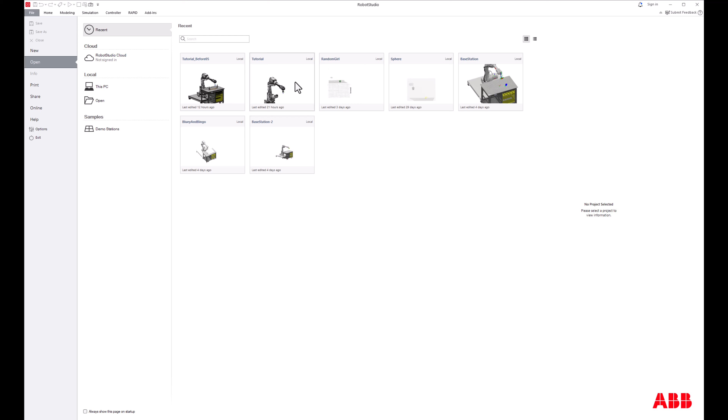So we are going to open up our old tutorial that we've been working on. And in this tutorial, before, we created a robot base, put in a robot cart, actually even had a path inside of it. So we're going to use this, but once again, I use a lot of shortcuts, and the keyboard shortcuts help me be quick at doing things. I'll try to call them out as I'm doing it so that you can kind of know what I'm doing in the background.

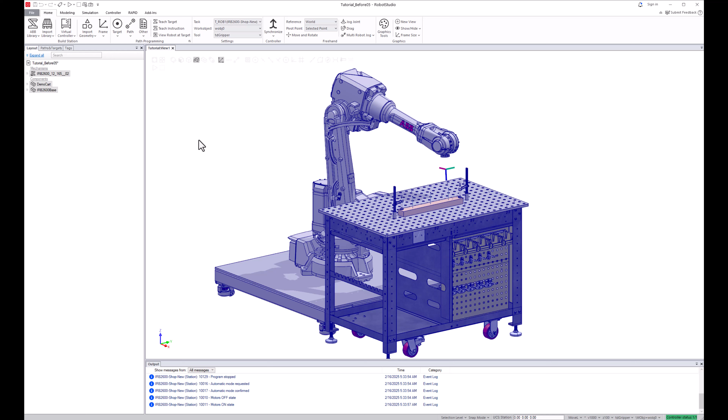For example, I want to make all these invisible, so that shortcut is Shift-Control-A. And again, if you want to see that shortcut, you can go to Visible, and it shows it right here, Shift-Control-A. That's what the shortcut is for visible.

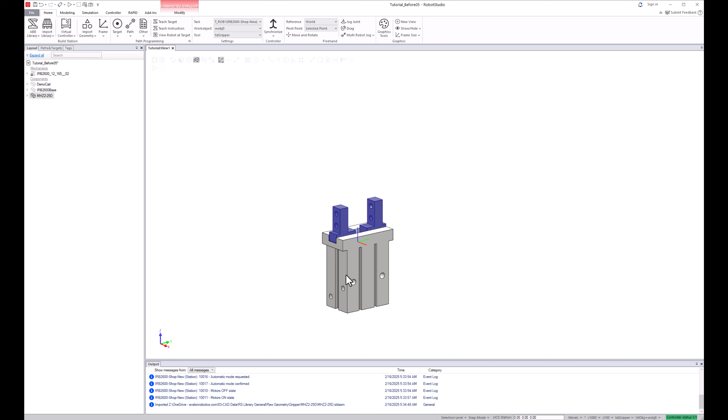So now that I've done that, we're going to start today by creating this gripper. This gripper is an SMC gripper. You can download it right off of the SMC website. It's an MHZ2 25D. These are SolidWorks models that I just downloaded straight from SMC's website. So that's the gripper that we're going to be working with today.

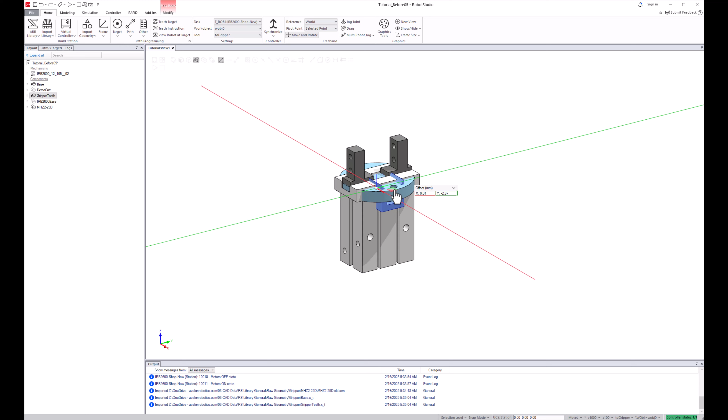I created a couple of parts inside Onshape to be able to mount this gripper to the robot. So I'm going to import those two parts into it. That's a base, and then one of the teeth. So I call it a tooth, but I'm going to call these fingers and this a tooth.

One of the things we have to do to get started is I'm going to hide the actual physical cylinder, the gripper, because I want to focus in on this base plate. The base plate is going to be attached to the IRB 2600 using these holes out here.

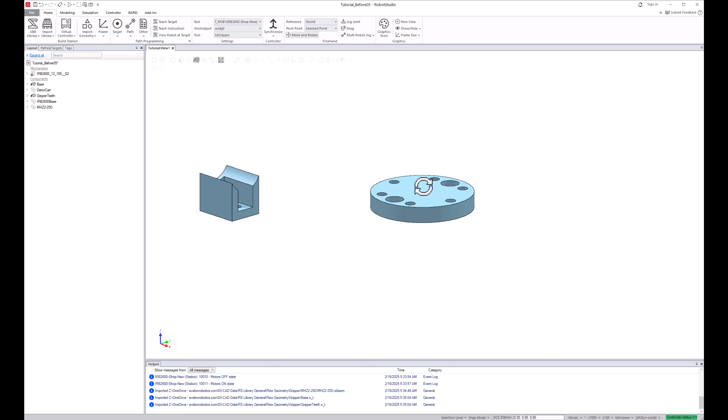When I designed this in Onshape, it's actually flipped around on the orientation that I want to have. So I'm going to come into this, and I am going to reposition it. So I'm going to do set position, and I'm just going to flip it 180 degrees. Oh, sorry about that, I moved it 180 degrees. I'm going to flip it 180 degrees around the x-axis, and then I know that it is 9.53 millimeters tall.

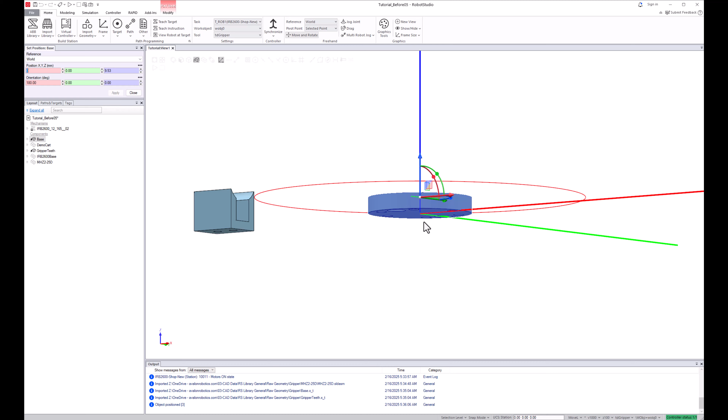So now what you can see is that the world coordinate system is down here in the center, and that's where it's going to get snapped to the robot. So everything is based off of this coordinate system, and that's the way that I want it to be in this. So I'm going to go ahead and close that.

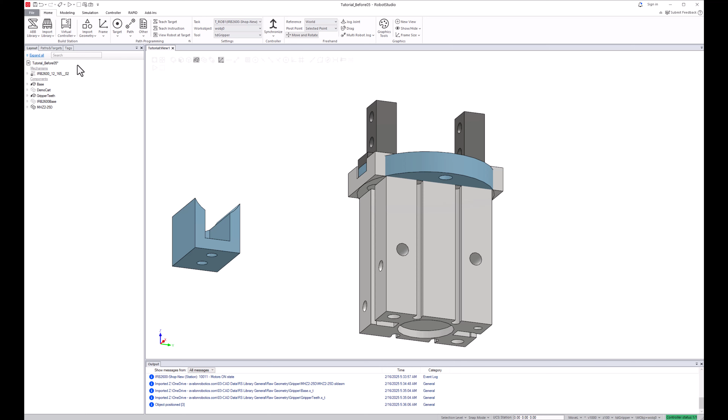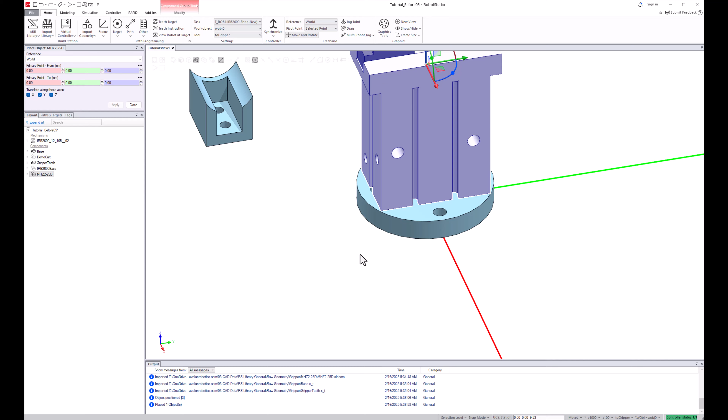I'm going to show Shift-Control-A, the cylinder, and now I want to move the cylinder up to the base there. So we're just going to go with a 1-point place command. This moves the cylinder. I'm going to make sure you select the cylinder and then select inside the XYZ combo boxes up here. And then I'm just going to select the cylinder, center of it down there to the center of this, and apply. And now it's moved it up to that, which is great.

That works good. And now if you can see, the mounting holes aren't lined up. So I have these bosses in here to put a bolt up through to mount to the cylinder, and then using these holes to mount to the flange of the 2600. So I'm just going to show you that here.

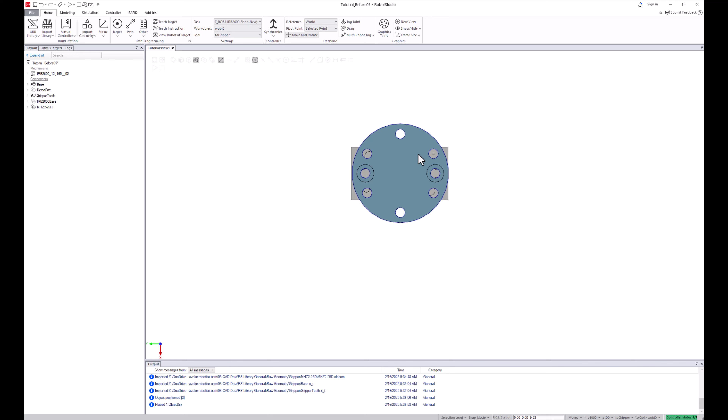I'm going to look at the bottom of this. Bottom view I have is Shift-Control-B. Okay, so then if I select the base, I'm going to show that I can grab the gizmo here, and I can rotate it around. And here you're going to see that there's the two holes that I want to align it to. And that's very interesting. So it's actually offset.

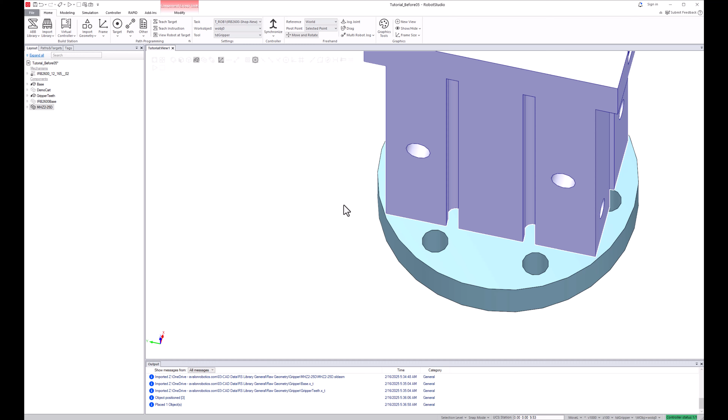So what that means is that, and I noticed that when I was moving the cylinder, I actually saw that there was a little bit of a shift when I did it. So what I'm going to do is I'm just going to look at the position of that in relation to the world coordinate system. And here you can see that there's a little bit of a shift. So I'm going to make these 0 and move that back.

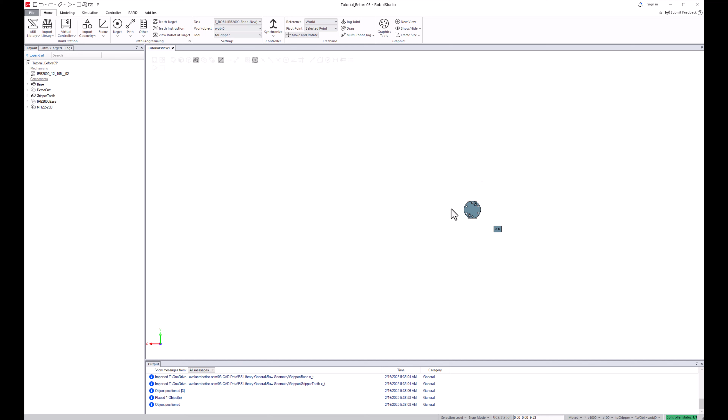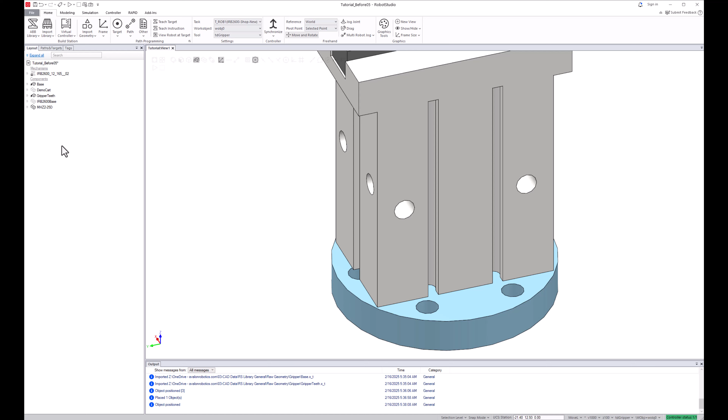So then when I look at it from the bottom view, select the base here so it's at the origin. And then when I actually rotate it around, we're going to see that those line up perfectly. Okay. So now I'll be able to put the bolts in through here, bolt it to the cylinder, and then you can see I'll have 4 bolts around it to be able to bolt to the flange of the 2600. So that's perfect. So now that we got that, I'm going to leave the teeth off of it for right now.

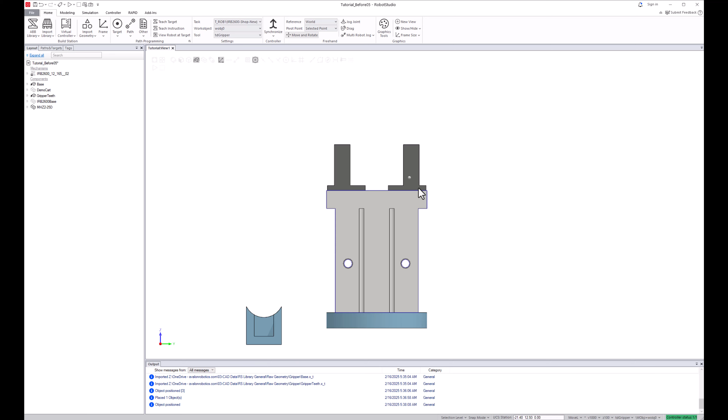And what we're going to do is move on to the next part, which is creating the mechanism. So this gripper has these 2 parallel fingers that move together mechanically with a piston inside here. So right now, nothing's going to happen. There's no motion, nothing. And how we do that is we're going to create a mechanism.

So I'm going to come up here, modeling tab, create mechanism. My mechanism, I'm going to name it gripper. It's going to be a mechanism type of a device. And then you got to create links and joints, and I'll show you how to do that. So double click on the link, brings up the create link box. And this is, I'm just leaving the names. Link 1 is fine. Oh, I forgot to do one thing. I'll show you here. I'm going to cancel out of that.

So in order to create mechanisms, you have to have the components in the main tree. They can't be nested underneath the component group. So I'm going to delete this because I'm going to use these 3 as my parts for the mechanism. So I'm going to come back over, double click links, come into here. I'm going to select the body. I'm going to set it as a base link, move it over into added components, hit apply. Okay. So it showed up as link 1 over here.

Now it just popped up another box here because I want to add some links to it. Another link is one of the fingers, add it to added components, hit apply, shows up on the right hand side. And then the last one, the other finger, add it to added components, hit apply, hit cancel. Now we have 3 links over here.

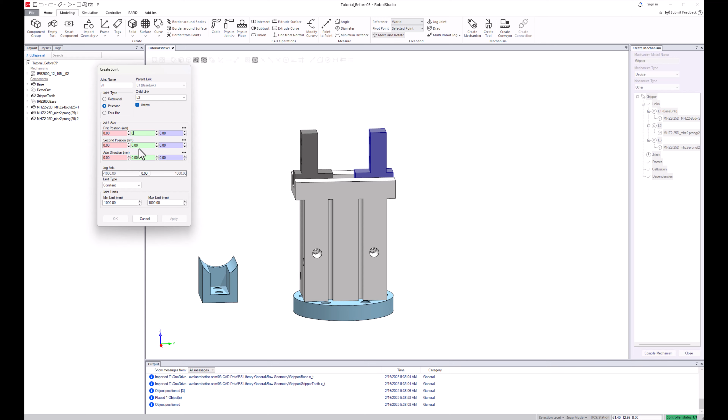Joints, okay, double click the joint. We're going to create a prismatic joint. It's just a linear move is all that prismatic is. I'm going to actually select my axes for this. So my axes is going to be, I'm going to come in and select my filter here so that I can select these points. So I'm going to do that as the first point. That edge is the second one. So my axis runs right through the center of that.

My limits are going to be 0, and then I just know that it's negative 7.1 millimeters. And what you're going to see is now that link moves back and forth. So I'm going to apply that, and now I can do the next one.

The most important thing when you're doing this is you got to make sure of how your links are related to the base link. Right now it shows that my link 3 would be in relation to link 2, which if link 2 moved over here, then link 3 would move according to that position. And that's not what we want. We want link 3 in relationship to the base link. Prismatic, we're going to come in, create my axes.

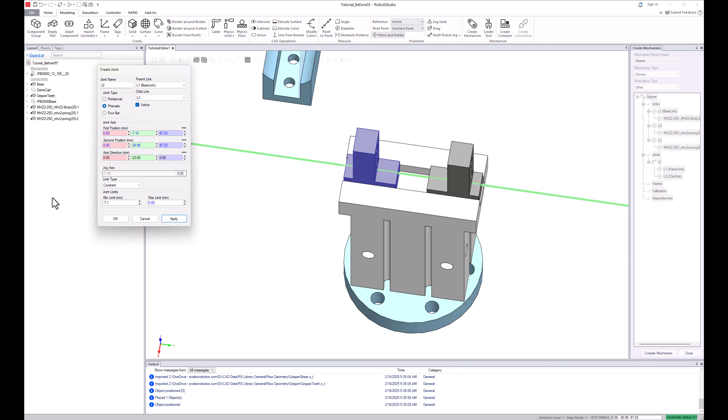Again, the exact same thing. Since I did this one from this point to this point, and this one from this point to this point, it's the exact same limits. Minus 7.1 - oh not 71, 7.1. You can always test it and see. Okay, so we're going to apply that.

Now we've created the links and the joints. We can come down here and compile the mechanism. And now we're going to add a couple of poses to it.

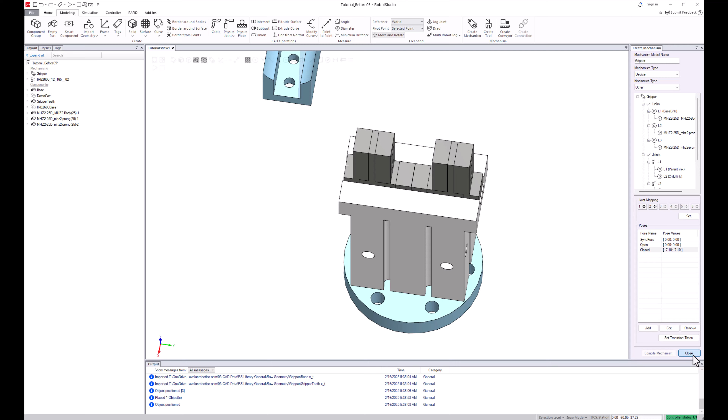So I'm going to add an open pose, which is exactly where the fingers are at right now, and then a close, and we'll say closed. We're going to say these are in the closed position. So now when I click these over here, open, closed, close out of that, and now we have our mechanism.

You can come over here and see in the menu tree that it actually created a mechanism called gripper. Inside the gripper has our bodies for L1, L2, and L3. Once you create the gripper, you can't come back in and manipulate any of the geometries in it. So you want to get all that done beforehand.

Okay, and then you can come in and select mechanism joint jog, and you can see that I can move these fingers. But again, these fingers move mechanically together with the piston inside this gripper.

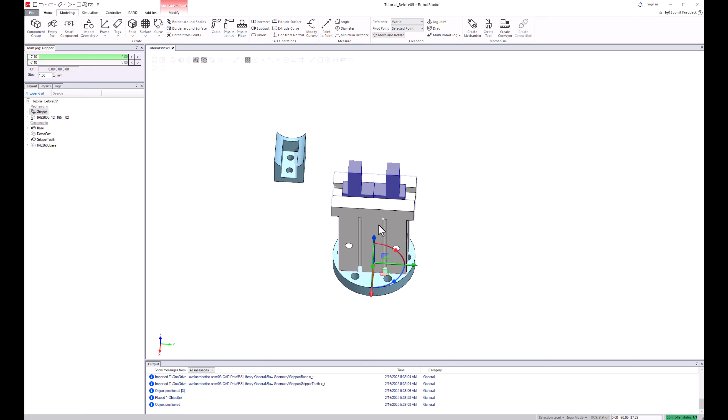So what we want to do to make that motion as real as possible is create a smart component. So up here we come up, create smart component, and inside the smart component, I want to be able to have a logical gate.

I'm going to come in and have manipulators, which is a pose mover. This moves a mechanism to a specific pose. We're going to select the gripper that we just did.

And here's a bug in RobotStudio, maybe they can fix this. But when you select it, it doesn't actually populate the poses. So I always have to close out, right click on it, go to properties, and now it actually updated the pose. So I want this to be open.

Okay, so we're going to apply that. So this is pose mover, open, open. I'm going to say it takes 0.1 seconds to fill the cylinder with air and open it up. Okay, so we just did that.

I'm going to come back over to the menu tree over here. I'm going to rename this to open. And then I'm going to copy this. So Control C inside the smart component, Control V. I'm actually going to rename this to SC gripper.

It's really important to me that people try to standardize how they want to name things. I don't care how you do it. For me, smart components are SC. Although it has the icon next to it, I just find that it's easier to see it in the menu tree over here or in the component tree when you have SC on it. So that's just personal preference.

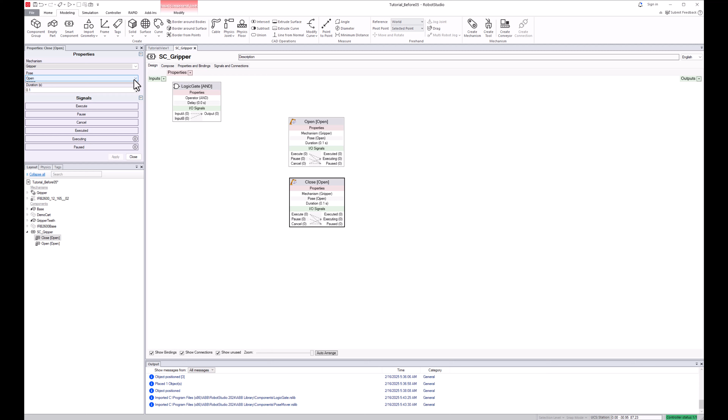We're going to rename this to close. The reason why I go in and edit the one smart component, this pose mover, I edit and set it all up, and then I just copy it. The reason why is because then all the parameters come across already in there. So it makes it really easy to come back in and just change this to closed. And now I have an open and a closed pose mover.

Okay, so now we're going to have a signal that we're going to come in and create. The signal is going to be - I'm going to call it DI close gripper. You can think of this signal as, think of how it's going to come out. So it's going to be a signal coming out of an IO port on the robot, goes to a valve. That valve, when I actuate it, I want it to close the gripper.

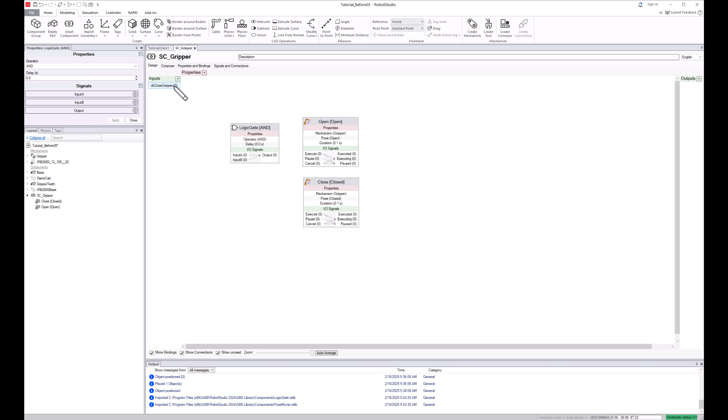So when it's a 1, gripper closed. When it's a 0, it's going to open back up. So I'm creating that signal in it right here. And now what's going to happen is when it's a 1, I want it to close the gripper. I'm going to invert the signal. So when it's a 0, this isn't actuated, it is. So when this is a 1, this closes. When it's a 0, inverted, and it opens it back up. So that's the smart component.

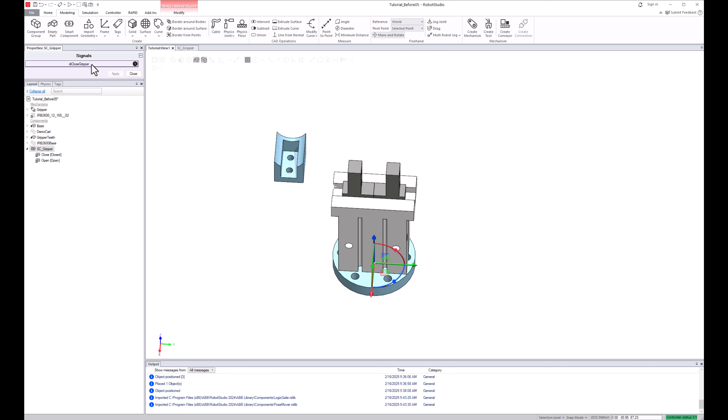If I want to see that, I just click on the smart component main top level, and you're going to see the signals that I put into here. So now I can go back into my viewport and I can open and close the gripper, and it did not work. And we need to see why it didn't work. Closed, open.

Okay, that's really weird. I can come in and I can execute these signals here. But inside here, when I select this, oh, I did not make this a NOT gate. Not. That's the problem right there. So now properties. Now it opens and closes just fine. Sorry about that. Okay, and so when I click this signal, now it opens and closes the gripper just fine.

Okay, so now, just to recap, we positioned the mechanism, put everything into place, we created a mechanism, we then created a smart component, and now we're going to create a tool. So I'm going to move these open because what I want to do now is make sure that I get the teeth in the right position. If you don't do this right now, you can't do it once you create the tool. So you need to put these in the right position so then you can attach them after you do create the tool. And I'll show you that here in just a second.

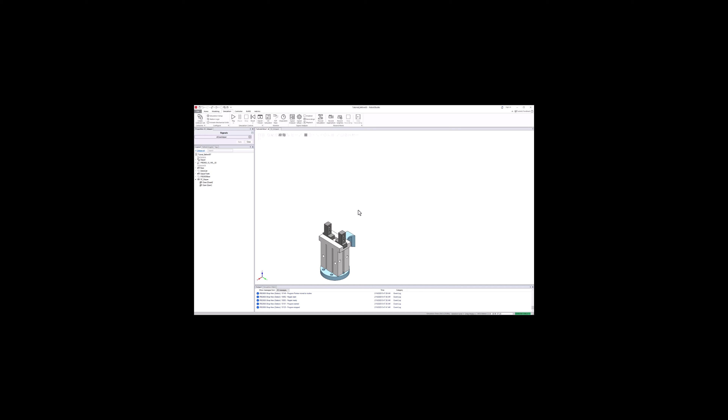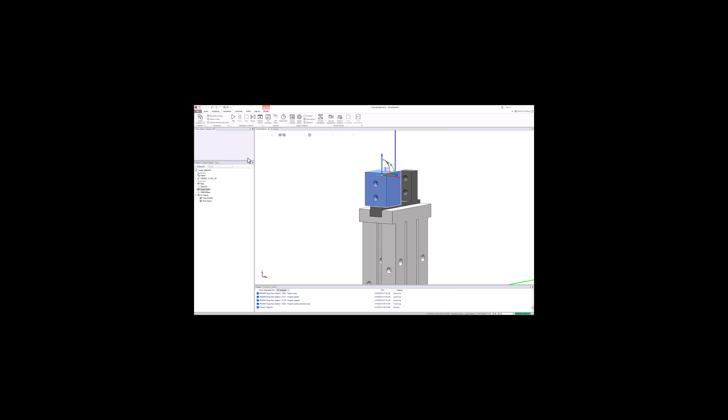So, okay, so there's one tooth. I'm going to move this. So this one tooth, come in, do place 1 point. And I'm going to select that hole. And we're going to select this hole. Okay, so I just created that one. I'm going to call that gripper tooth A. And I'm going to copy that one, paste it in, call this one gripper tooth B.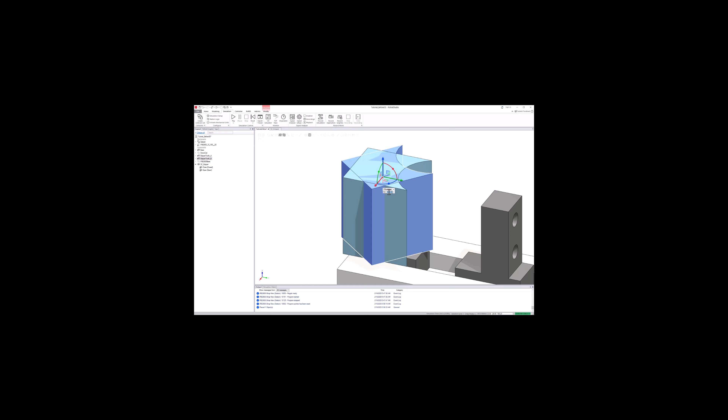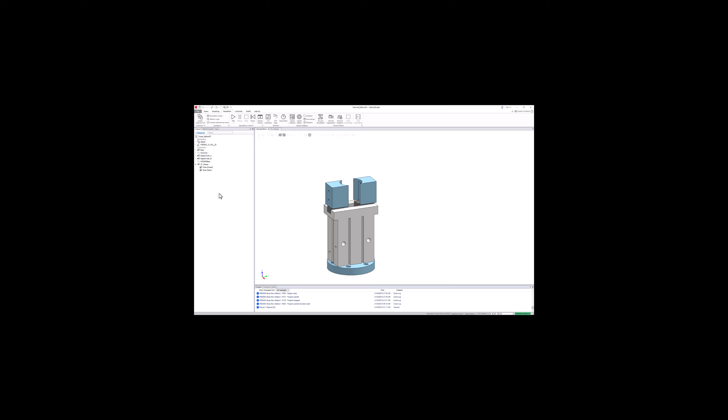Okay, so B, we need to rotate 180. We're going to move it way over here and do the same thing, kind of a mate type of thing, just placing it right where we want it to be so that we can attach it. So that point to this point, and now you can see our gripper looks pretty good. I'm going to come in just to make it look better. I like things to look good.

I'm going to set the color. I'll do a graphic appearance. So I'm just going to apply a material. It's going to be a dark gray and hit OK on that. So now it looks good. Okay.

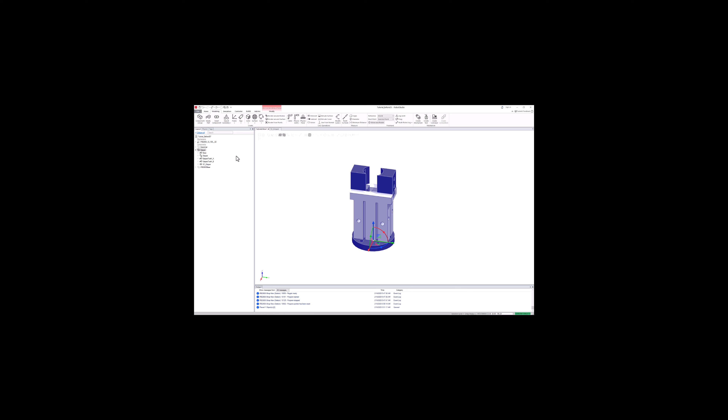Next, we want to create a tool. Here's a really important step that I would suggest. The first thing we're going to do is we're going to create a group, and we're going to call it gripper. And yes, you can name things the exact same name. I'm going to move the base, the teeth, the smart component and the mechanism all inside the gripper component group. Highly suggest this. Copy and paste that.

I would suggest to name this something that you're not going to use, because I messed up on this last time, and I'll show you where I messed up on that. But just as a backup, because once you create a tool, you can no longer access all these things and you have to start all over. But if you create the backup here, it's just a copy of it, and now you can reuse it if something bad happens. So, okay, gripper.

So now what we're going to do, create a tool up here, modeling tab, create tool. My new tool is going to be, I try to name things again, TL gripper for tool. I'm going to use an existing set of geometry, everything. I'm going to call it gripper. I know it's about 0.5 kilograms.

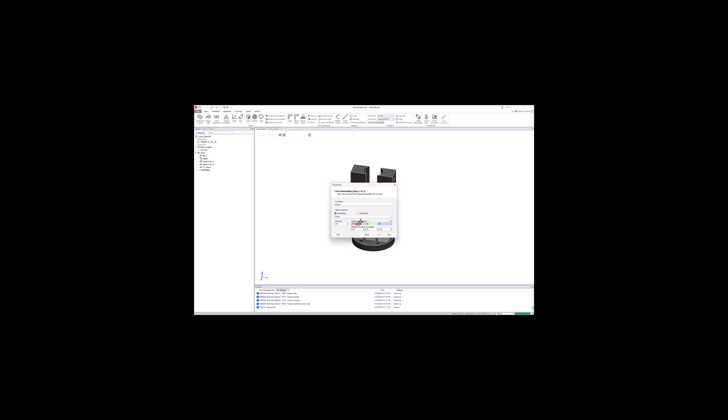It's about 50.8, 2 inches up. Going to move into the next one. This is going to be the tool data gripper. And I know that it's just straight up, and it's going to be 87.2. And where I'm doing that is I want that to be right up here when these two are closed, right at this point when it's closed. And you'll see that here in a second.

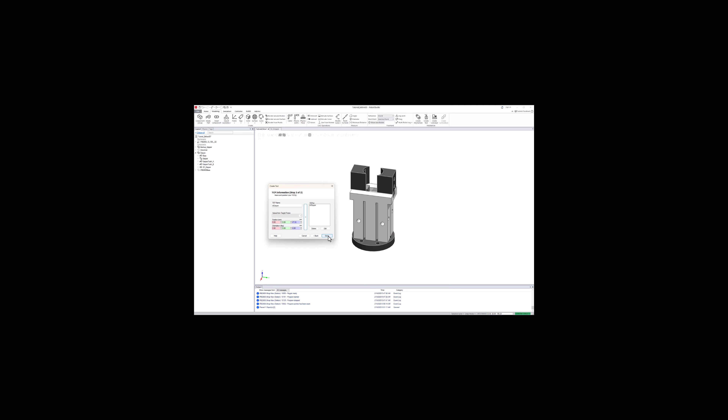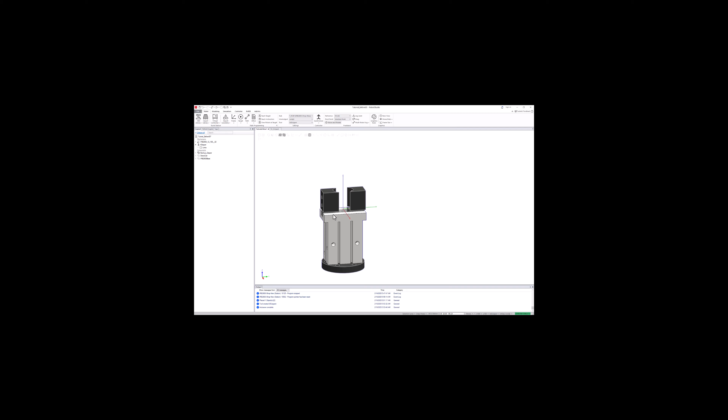So I'm going to say done. And when I hit done here, it's going to create a tool, and then it locks all this up. So there it is. Tool done. Really good. Inside my tool, what you can do is go into the Home tab, and now you can see I actually have tool data, not TL, because that's the main tool. My tool data is TD gripper, and you can see that that's my tool, my TCP for this tool. Really good.

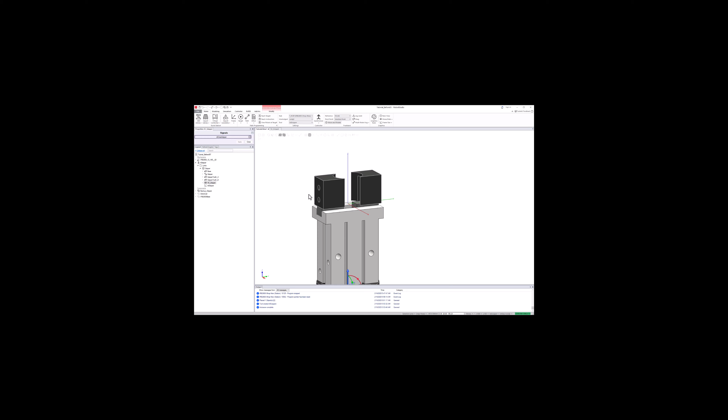Okay, I now can go in and what should we look at? Smart component, right? So if I do the properties on the smart component and I do this, you can see the teeth inside here are actually moving, or the fingers, but the teeth aren't. So this is what I learned in a mistake. If I right click on here and go to position, I can't move the geometry or the bodies inside of a tool. What I can do though is I can attach them to the tool.

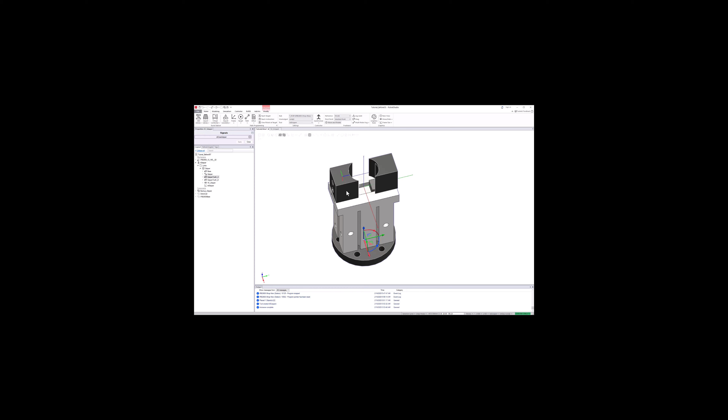So I'm going to come down and I'm going to go to my tool gripper, and inside here, as you can see, this is selected on tooth 1, which is this one. So this is tooth A. I'm going to right click on tooth A, attach to, go all the way down to the gripper, and as I highlight over the top of the two links, you should see them. Oh, and they don't. It's hard to see which one's which. So you just have to figure that one out.

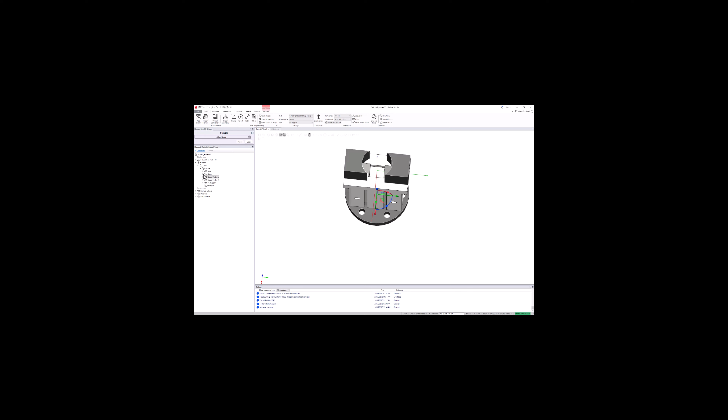Which I can come into here and I can do links, I can do gripper, I can do my links, and link 2 is this one. Link 3 is this one. So link 3 goes to tooth A. Okay, so that's what we have to do. Attach this, go to link 3, don't update the position of it. Tooth 2 or B goes to link 2, don't update the position. And now when I go into the gripper, it's perfect.

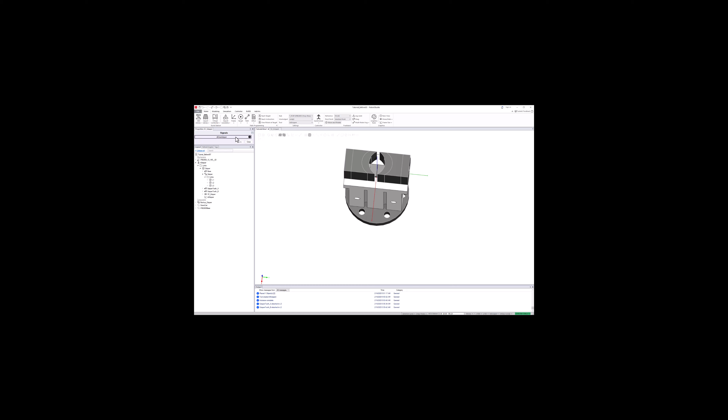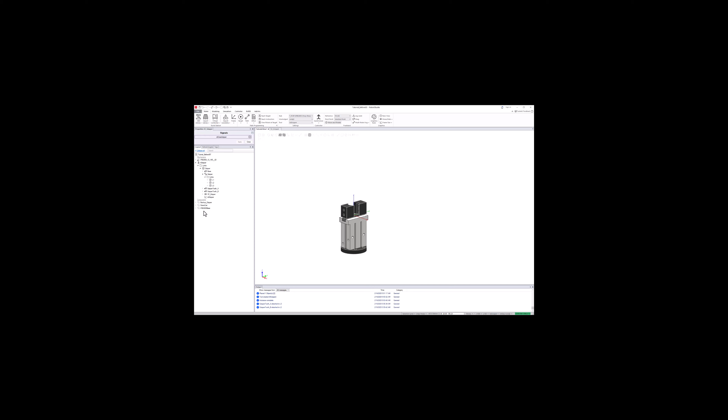Oh, here's why. I didn't hide the backup. I should have hid the backup. Because now you can see there's the tool. It opens and closes with an I/O signal. So now whenever I do a digital I/O signal and open and close that, it's going to open and close. Great. Next step. We're going to come back in.

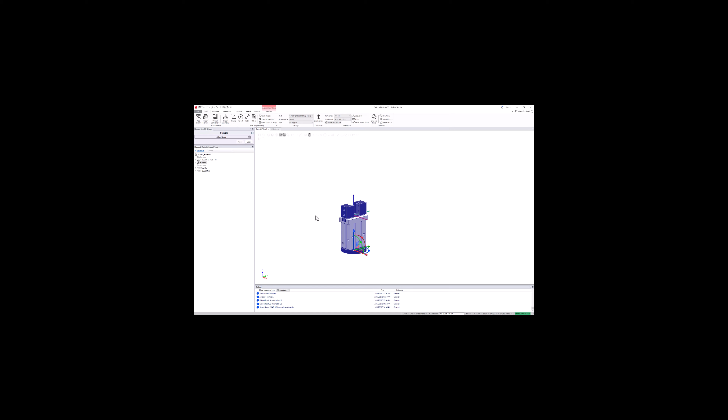I really don't need the backup gripper anymore, so you can delete it or you can save it as a library. You can do whatever you want. Right now, I am going to save this as a library. Inside my RobotStudio libraries, I have an end of arm tool, and I always try to, again, standardize naming, end of arm tool, TL gripper, and I'm going to save that just so that I have it saved and I can use it whenever I want to.

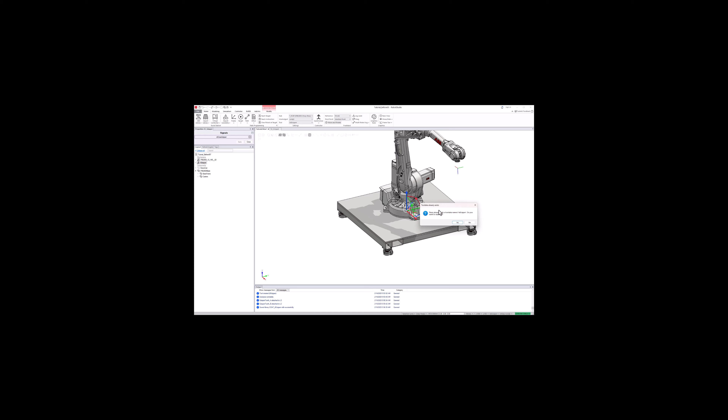So the base, I'm going to show the base of the robot, and I'm going to show the robot. Because now what we want to do is we're going to attach the tool, attach to the IRB 2600, find that, T_ROB1, select it, and yes, I do want to update the position of it, and yes. And now you can look and you can see that we have a tool sitting here.

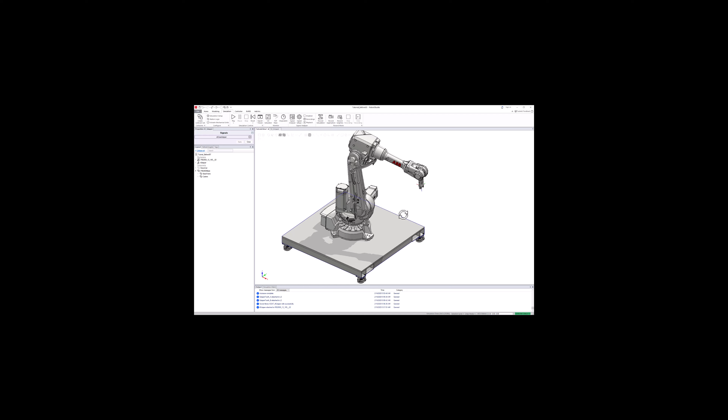Okay. So one more thing that I'm going to add to this one that I didn't to the previous ones is I want to show you how to actually have an I/O signal to open and close this in Rapid. Because in the Rapid program right now, you can't get to the smart component. Okay, so on the controller tab, we want to come in. I come in into configuration, and you can do add signals. And this can add a group of signals, like a lot of signals.

You could add 50 signals if you wanted to, or you can just add a single signal.

How you do that is you go to configuration, I/O system, into signal, double click it, right click, new signal. I'm going to call this digital output close gripper. Type of signal is going to be a digital output. Assign to device - since this is a virtual controller, I don't have to assign it to a device. My access level, I want to create all, and I can hit OK on that.

Obviously, one of the bad things inside the controllers is once you put a signal in, you have to restart the controller. I think that's probably everybody's biggest pet peeve about ABB's controllers - that you actually have to restart the controller. Okay, so now we have a signal inside there.

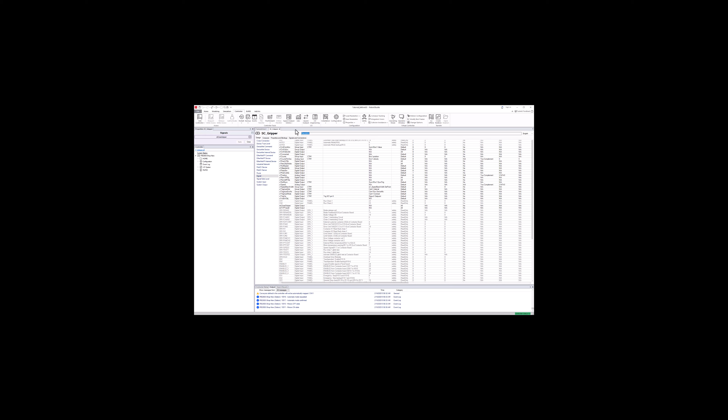What I want to do is I'm going to come into the simulation tab. I'm going to go to station logic, and now you can see I have the 2600 here. I'm going to select the DO close gripper.

Very interesting. So since this is inside of the tool, it's not showing the smart component here, so I can't attach that signal to it. That's a bum deal.

Okay, here's a quick little update. I was playing around with trying to get the station logic to work with the signal in the gripper that I created. And one of the things that I showed was how to be able to create the tool data with the gripper.

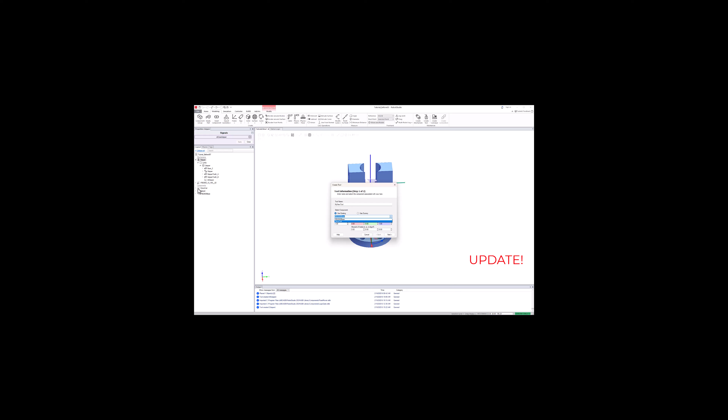All of that's the same except for you got to leave the smart component out of that, because if you create the tool with the gripper in the component group, you can't access the smart component from the station logic. So I created the gripper the exact same way, doing the exact same thing, but I did not have the smart component in the component group that I selected inside the tool - like use existing, this selection here, this component group - I didn't have the smart component inside of that when I built the tool.

So then what I can do is I can come over and I can create a new component group, and I can truly call this tool gripper. The only thing is that it's not going to show that tool.

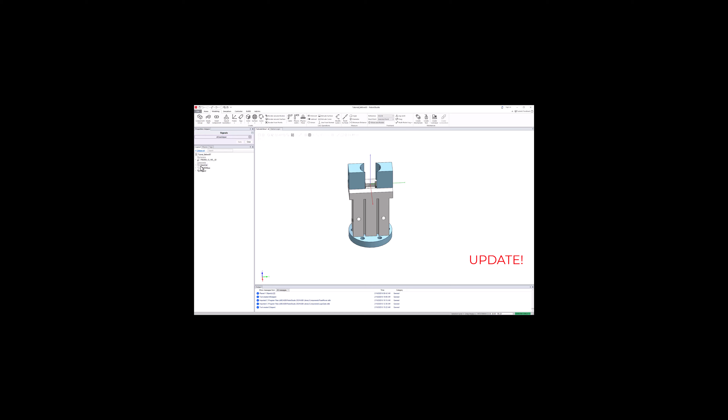So then, if you move the smart component into that component group after you've made it - see how it takes it out? So you can't access it.

So in order to attach the signals to it, you have to do this - DO close gripper to DI gripper, okay? And then if I move it into it, it's hidden, it's not showing up.

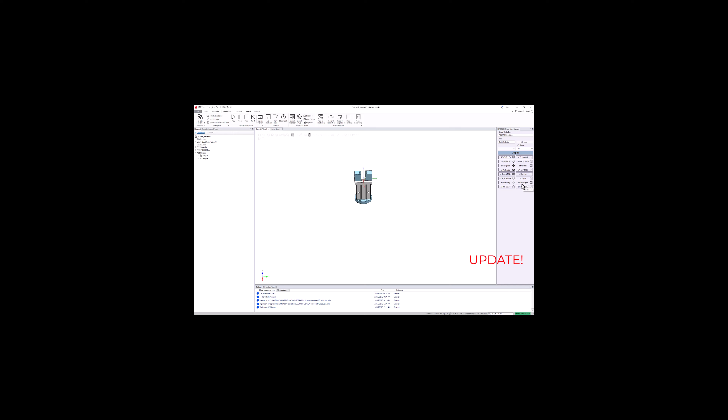But if I go into my IO signals - sorry, let me get it here - simulation. Over here, do digital output, and I'm gonna do DO close gripper. You can see that it's actually doing it. It's attached to it. It's not in the station logic.

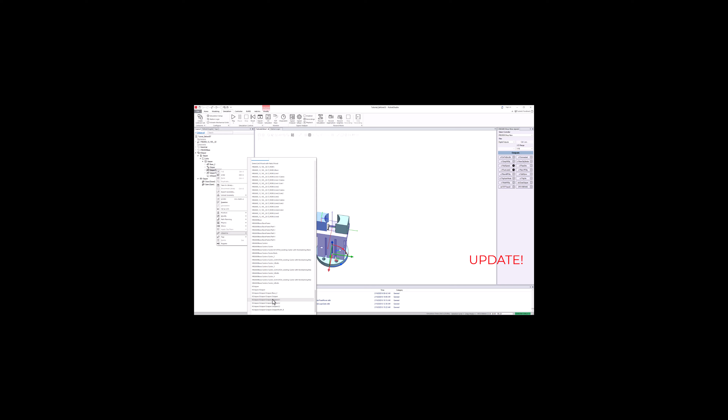In addition to that, if you remember, we have to actually attach the teeth to the... so that tooth is going to be attached to gripper link 3. No, I'm not going to update the position. Attached to gripper link 2. No.

And there you have it. That's with the station logic. It's not shown in here, which is very odd. It is part of this component group.

Now what I can do is I can right click on that and I can do save as library and do an end of arm tool of this one. I'm gonna overwrite that one. And then the only thing that you would have to do is that you would come in and you would import this in, disconnect the library, and move that subcomponent group out.

Little nuanced, don't really like it, but that's the way that it has to work. Hope that helps. There you have it. So you have a gripper now attached to the robot, and your gripper can be open and closed.

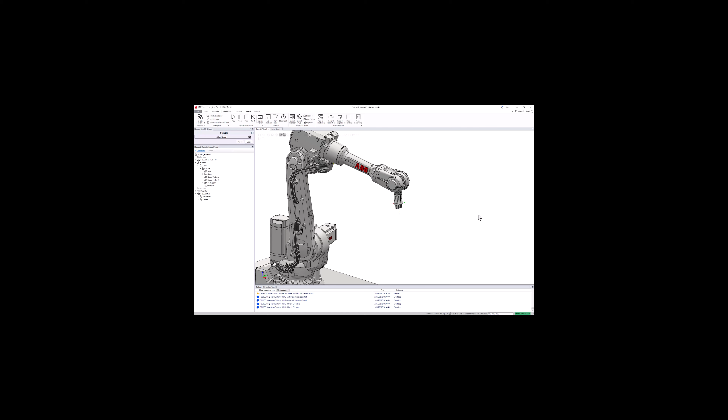Hope you enjoyed that. Next time we're going to connect the signal. We're going to try to do some motion with it.